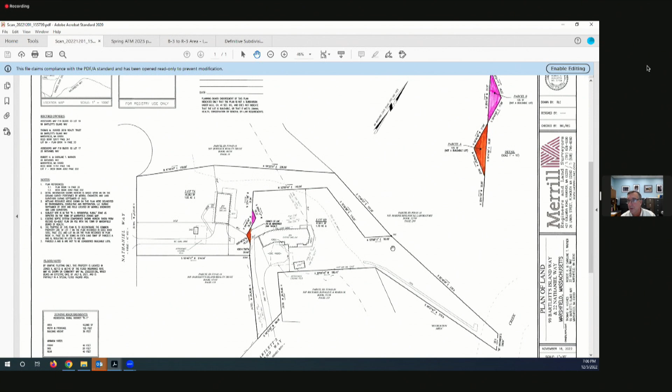Okay, all right. So they're swapping the same amount of land between the 2 of them, so the house meets the side setback requirement. Okay.

Any other questions from the board? All right, seeing none, is there anyone here from the public again? See everybody, so just say it if you're there.

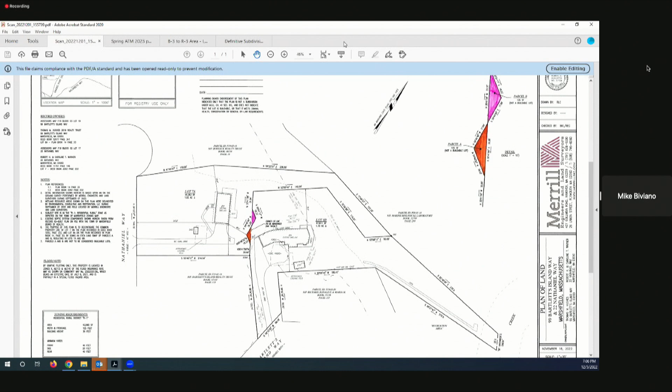All right, I didn't hear anyone, so I'll make a motion that we approve the A&R plan as presented for number 22 Nathaniel Way. Is there a second? Second, Katie O'Donnell. Aye, Katie O'Donnell. Nick Papastratis, aye. Fred Monaco, aye. Still no Kevin. Mike Viviano, aye.

Okay, we're going to move on. We're going to make a motion we open the public hearing for 965, 975, and 985 Plain Street and waive the reading of the notice. Is there a second? Second, Katie O'Donnell. Aye, Katie O'Donnell. Thanks, Katie. Nick Papastratis, aye. Fred Monaco, aye.

And Mike Biviano, aye. All right, who's presenting this one? Steve Guard. Okay, hi, Steve, go ahead. Hi, Mike. Good evening, everyone. Attorney Steve Guard for the applicants, and with me is Ben Verga and Deb Keller from Merrill Engineering.

So I have the distinct pleasure of finally presenting to you folks the definitive subdivision plan that will allow us to install the School Street signalized intersection at School Street and Plain Street. So that having been said, I have a little narrative that I would like to give you as an overview. The plan is rather complicated in the sense that it has 4 property owners, and there's some pieces to the puzzle that we're shuffling around to make this all work.

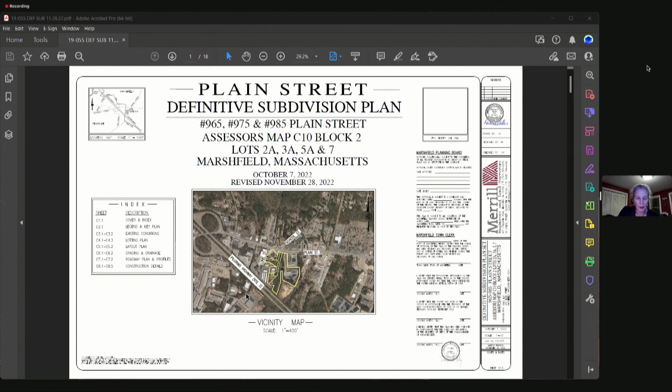Hopefully everybody can see the screen here. Let's see if I can get this out of the way. Again, I'll start from the beginning. This is just an overview of the cover sheet, but it's kind of a nice locus that shows where all the parcels that Steve kindly described are.

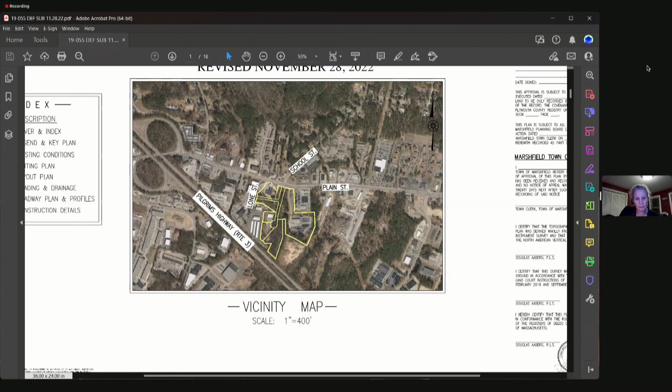Again, this is the DPW site. This is 985 Plain Street here. And then this is the Martin's property in the back.

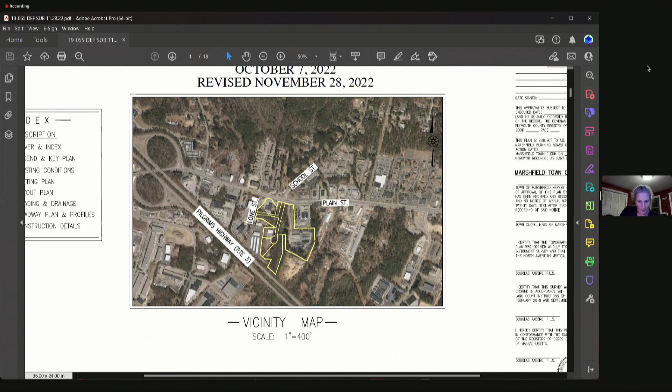So as I move forward, this was our key plan. This one might be helpful to give bearing again to the description of our connector road from Lone Street here on the left-hand side of the plan. So this ties Lone Street to the road, what we call Road B, where we'd have the signalized intersection with Plain Street, identifying the newly defined lots as Steve mentioned, six lots.

So we have lot 1 here being the DPW lot. We have lots 2, 3, and 4, which would be the Martin's property lots in the rear. And then 5 and 6 are the division of the 985 Plain Street property through the creation of Road A.

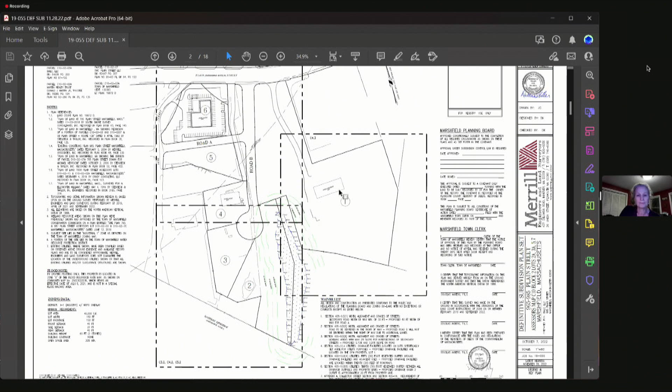I'm going to zip through. This is just existing conditions, shows you the development of 985, and the development in the rear on the Martin's property.

Deb, if I could hold you up there and go back to the existing conditions. Sure. I think it would be helpful for the board if you could just point out the proximity of the driveways to the signalized intersection, and why it was imperative for us to all work together to consolidate those driveways so that they didn't offensively interfere with the signal.

Sure. So the goal is to have the intersection aligned with School Street, which you can see up at the top of the page. To the right is the DPW driveway, so it's not quite aligned with School Street. You have the Martin's property, and I apologize, my little thing keeps flagging there, but this is the Martin's driveway coming out to the rear, again still not quite aligned up with School Street. And then you have Lone Street over here with the geometry that we'd like to help eliminate from a safety perspective, having that tie in.

So being able to pull all three of those driveways together and align them with the signal with School Street would be a much safer situation, eliminating three down to one.

This shows you the road layout again, with the design of the signal going through Mass DOT's review. We do have a wider right-of-way for the beginning portion of Road B to allow for a right turn and a left turn out, as well as one lane coming in, narrowing that down to the traditional two-lane roadways when you get to the remainder of Road B down to the cul-de-sac, as well as Road A here. So those would be the two right-of-ways being created here.

And this shows the end of the cul-de-sac. Gonna hop to basically, so you can see a little bit of we brought in some of the striping for the intersection just to get a general perspective of how the signal would be aligned.

So you can see here, this is the 2 lanes coming into the intersection. So you have a right lane and a through lane, and then a dedicated left lane, and then the one-way coming in. So that all lines up with School Street.

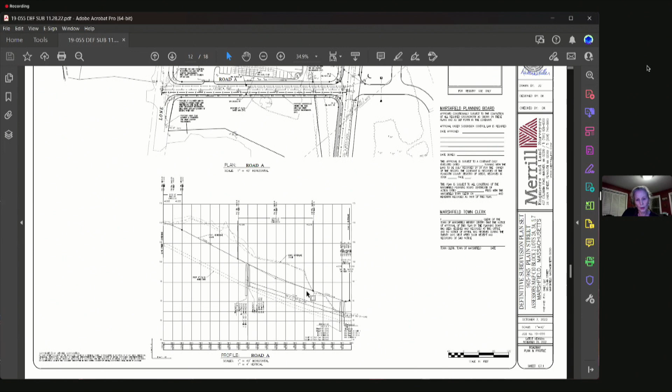So this is the road profile for Road A again. You can see the existing topography we're working with. It does drop off at the intersection, and it's quite high up in this portion of the road. So we're trying to work with that. Let me zoom in.

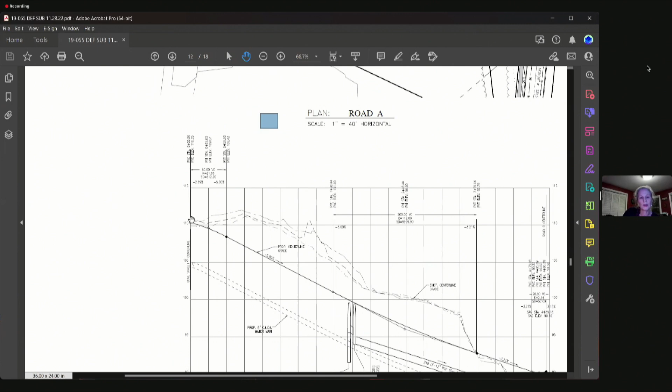This flattens out a little bit here. We're going from almost a 2.7% grade at the intersection to a 5% grade, and then a 3.2% grade as we come into the internal intersection here.

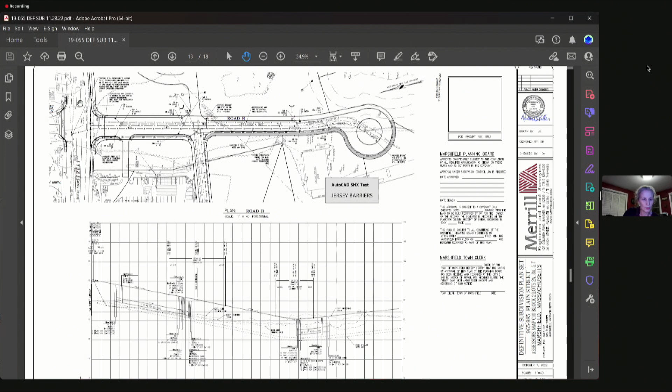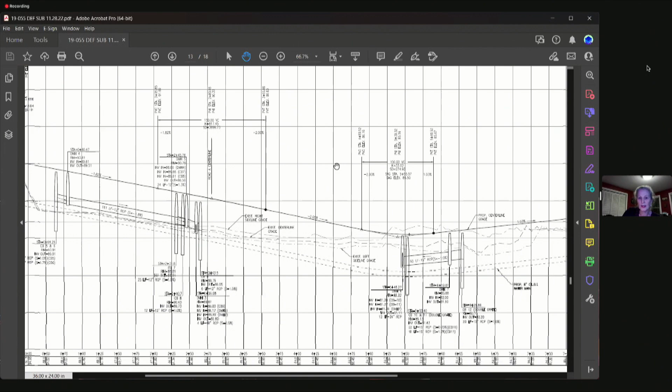Let's zoom out again. This would be showing you the profile for Road B. Fortunately, here we're at a high point, so we don't have to worry about Mass DOT and any drainage going into Plain Street. We will capture it all on site, collecting it into the two infiltration basins we have on property, down to a low point approximately in this location, and pitching back up as we go towards the cul-de-sac. On average, I believe this profile is 1.8 to 2%, so it's a softer grade on this profile.

And then we're into details again. So that's a quick summary of the plans we did. I see Mr. Brennan is on the call with us. We did respond to some comments, and I believe we've addressed all of them.

As Steve mentioned, our understanding was parcels C and D, which I can highlight for you here. This would be parcel C in this portion, and parcel D is here on this side. Let me get you to the lotting plan, I think that'll be easier to see. Okay, so here's parcel C and parcel D.

I think originally we had spoken about conveying those to the town, and those details might need to be hammered out a little bit more, but that was the intent, so it's noted on the plan. I think we had a few cleanup details addressed, and we added the additional waivers I just spoke about to the plan set for the record, along with the street trees along the retaining wall. I think that covers most of everything.

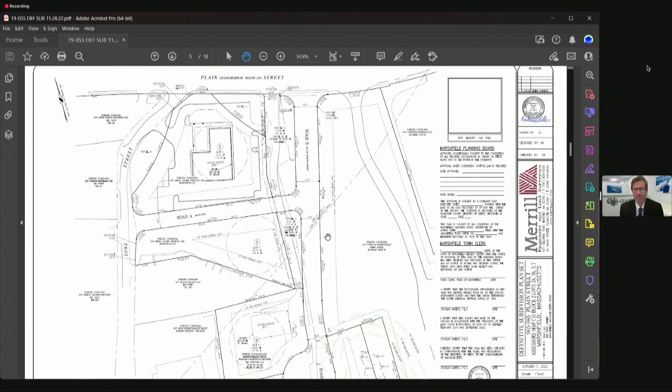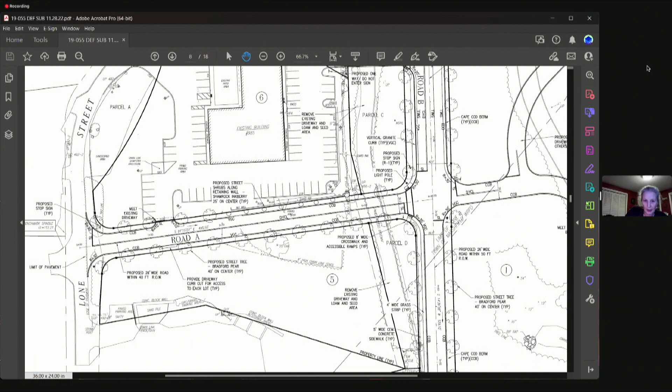Can you show the page that has all the plantings on it? I know it's not a landscape plan, but it's indicative and shows the street trees that were proposed. So you can see I've highlighted all the street trees as compliant, except for in this one section where we have a retaining wall close to the right of way. We wanted to make sure those plantings would be successful, and felt the shrubs would be more successful than street trees in that location.

If the board may recall, when we came back in for a site plan reconfiguration with South Shore Buds, we anticipated this plan coming forward. So the site work and approvals for South Shore Buds are already done, that's all set. When they did the site work on the parking lot, McDougal planned around this plan. We've already dug away at that big hill back there, getting ready for this Road A, so to speak.

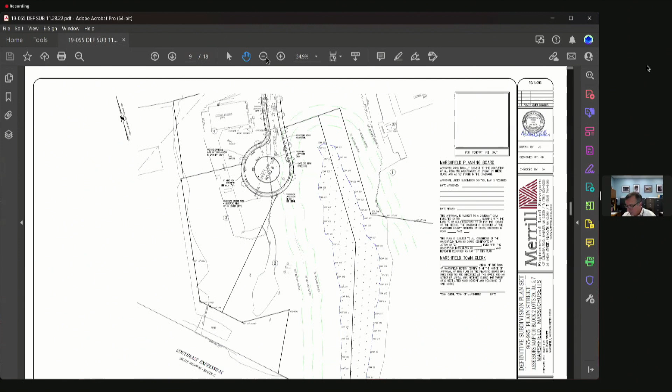On sheet C4.1, the lotting plan, parcels C and D, the plan has those being conveyed to the town.

The northern part of parcel C, I understand why, because you see parcel B has that curve coming down from the 500-foot line from the daycare. So if that was carried over, the top or northern part of parcel C would go to the town and be joined with parcel B. However, the lower part of parcel C and parcel D, I feel it would be better if it went to merged into lots 6 and 5.

Because we're going to have all these scattered little sites of town land, which will be hard for the DPW to maintain, et cetera. So my recommendation is the lower part of parcel C and all of parcel D be merged into those other two lots.

Sheet C5.1 layout plan -- and this also applies to C6.1 grading and drainage, and C8.3 construction details -- what I'm talking about mainly is your street trees and your sidewalks. Pat had kind of brought it up. There are a number of locations where the street trees are not in the street layout, so we would either need easements, as Pat said, or we need to look at the design.

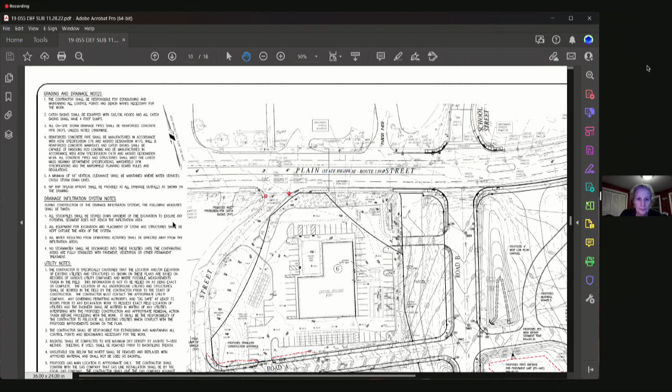The first part of roadway B as you come in has the sidewalk along the street. Then past the intersection of Road A and the DPW drive, it becomes a different road layout, and we have a 4-foot grass strip between the sidewalk and the roadway or the Cape Cod berm. One way to deal with this is to put the sidewalk right up against the street, shift it over, add the 2 feet from the outside of the sidewalk and the 4 feet to the area, and plant the trees right on the property line. That gives us a better buffer between the street trees.

I brought this up because at Beaver Crossing, a recent subdivision, it was a very tight area between the street and the sidewalk. As the street trees were being installed, several DPW people mentioned to me that the street trees are only going to crack the sidewalk as they grow up -- you need a wider strip. So that was something I wanted to mention. Also, there is no sidewalk along Road A, which they did mention.

One of the questions for you guys to think about: what is the truck traffic we expect off of Lone Street, the size of trucks, etc.? Could we change Road A from a 26-foot wide paved road to a 24-foot wide road? And then maybe shift the road off center and put the street trees only on one side, since you already have the retaining wall on one side.

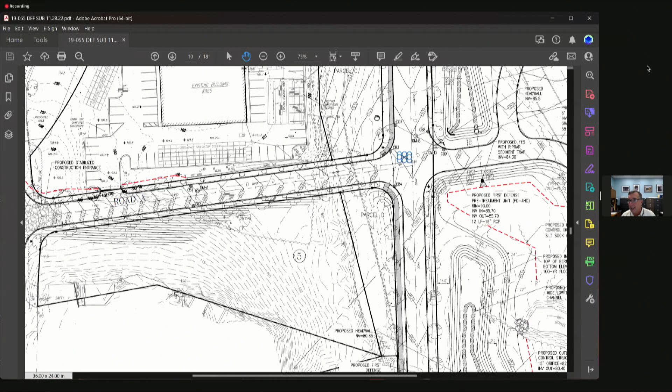So just something to think about also for Pat to take a look at. Then under Road B, station 0 to 100 up at the top by the intersection with Plain Street, the entrance lane is 18 feet wide until we get to the entrance driveway for Buds. Then the road bumps out a little and goes down to a 14-foot wide entrance lane.

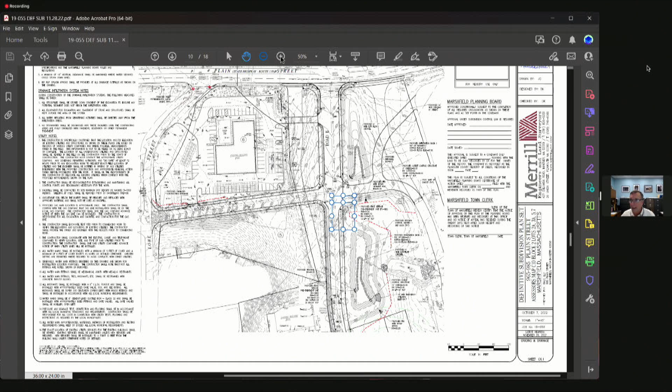So you have one lane coming in and two lanes going out. My question for everybody is, should we just make Road B from 139 to the Road A DPW driveway one width wide? We're going to have a lot of dump trucks and other trucks going into DPW, et cetera. Does that wide width make sense at that intersection to ease turning? If the Kia/Quirk connection is continued or left, we could potentially have car carrier trucks going through that intersection as well, so standardizing that roadway width may make sense in that section.

That's actually it for my comments for now. We know that DPW would like to hammer out a few things, so my recommendation to the board is that we will probably continue the public hearing either to January 23rd or the first date in February, if we hear any comments from DPW on that tonight. With that, Mike, I'm all set.

Shauna has had her hand up for quite a while. Okay, I'll go to the board first to see if they have any questions. Any of the board members have any questions at this time before we go to the public?

Yeah, Mike, I have a few things I just want to confirm. One is there are no proposed changes to Lone Street in this, correct? That is correct. Right, Nick.

We played with a whole bunch of ideas of what would happen to Lone Street, and I think that's still in progress—whether we end up closing it off and put like a turnaround down there for the motorcycle place and for the other South Shore Buds entrance. You're probably going to ask what are we going to do with that entrance. I think ideally we'd want Lone Street to temporarily be a right turn in only, hopefully, and then everybody will go to the light. But ideally it's kind of up to the town what they want to do there. I think there's a lot of options, none short of eliminating it altogether, as long as we can get fire trucks in and out and around there, as opposed to making it a do-not-enter or something like that.

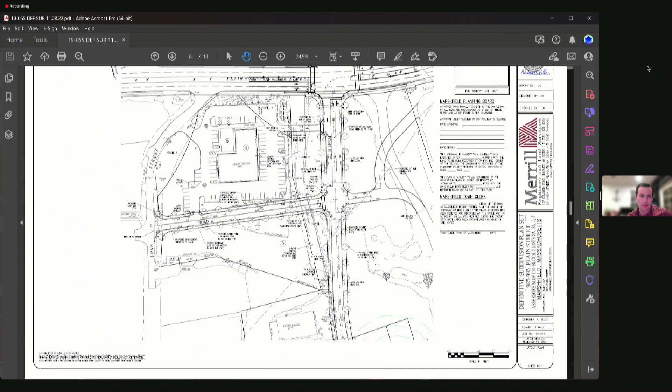Okay, thank you. The next is, I guess this plan shows it better—it looks like there's two proposed crosswalks over Plain Street. Is that correct? Yes, here there's actually four going all the way around the entire signal intersection. Okay, great.

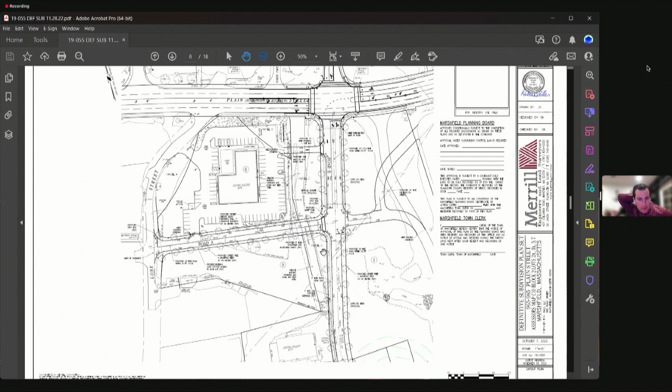Next question, the cul-de-sac, that inner circle—what's proposed? Is it a Cape Cod berm? I didn't see a note on that. So we have, I believe, Cape Cod berm currently, and then the interior of the island would be landscaped. Okay, oh, is that what the CCB is? CCB, okay, yes, gotcha—Cape Cod berm, yep.

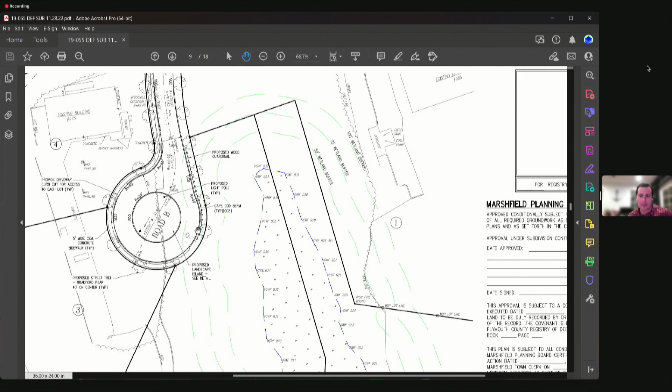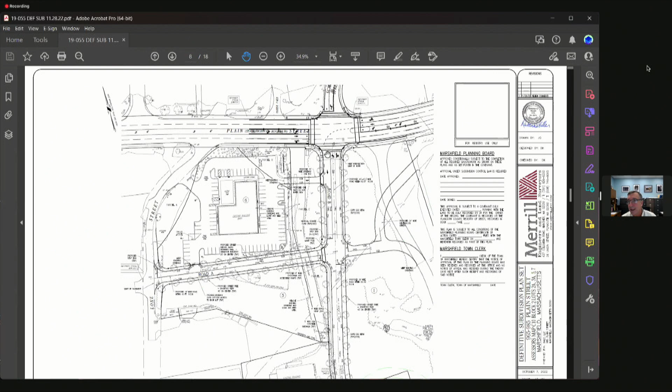Perfect. And then I don't recall discussion on this—has there been a traffic study related to this intersection? Yeah, Ian, we have the team that we have on the MassDOT application is the traffic company. I'm sorry, I was going to say, Nick, we have under the 75% design to the state, there is an attached study. Okay, great, all right. I think that was everything I had.

Okay, thank you, Nick. Anyone else from the board right now? I'm all set. Okay, great. I can't see everybody, so if you're on the board—Kevin is with us now. Yeah, Kevin's with us, he joined a while back. Okay, seeing no one from the board, I'm going to go to the public.

If you could just say your name and address—Shauna, I'll go to you first, thank you for your patience. Yes, Shauna Manning, unit owner on Parish Path. And my concern with the new traffic signal at School Street—Parish Path is separated from School Street with the Sowing Seeds Church. And I do not see how I will ever make a left-hand turn out of Parish Path with the lights there and the amount of traffic.

How do you make a left-hand turn coming out, cutting across, coming out of Parish Path? I don't see how I'm going to make a left turn to go to downtown Marshfield. Is that a double yellow anyway, going down there now?

Is that a legal left turn right now? Yes. Parish Path at the end of the street has no stop sign, and you can turn right or left to get out of Parish Path onto Plain Street. With this traffic light, I don't see how I can leave Parish Path and take a left turn.

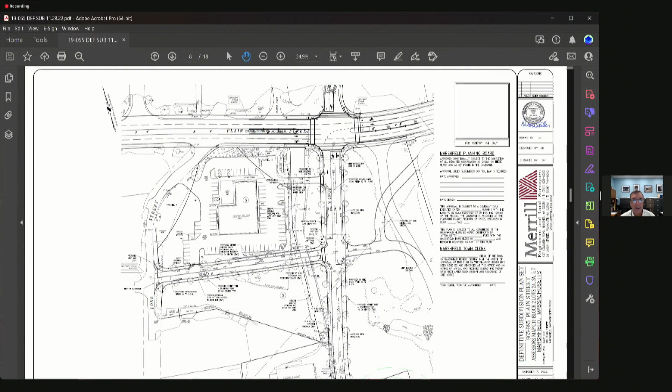You'd have to see the air photo in order to see it. Let's see, hold on one second. I'll share this. Yep. So Greg, you're thinking it needs a new connector behind sowing seeds? So see where the arrow is? Yep, and here's the driveway.

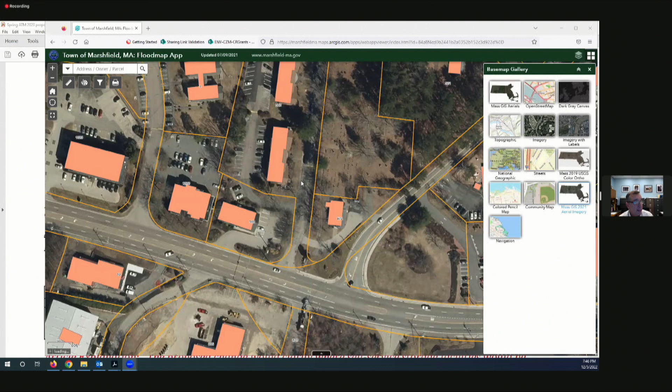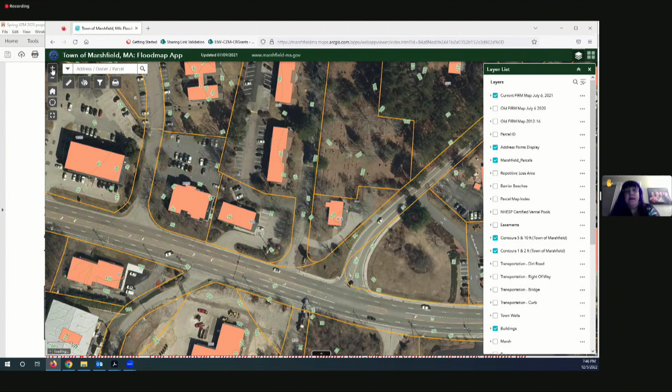It is rather steep when you go where they are now and go to the very back where it's wider. There's a little way onto School Street, and it is steep. Yeah, and the way Greg proposed it is steep as well, I believe. Is that correct? Yes, it is.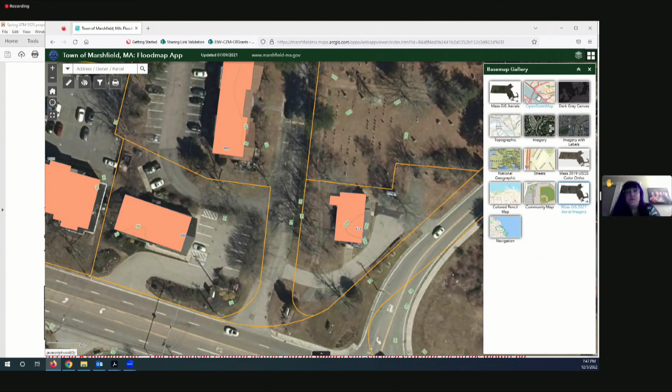Are we trying to roll this all into one plan to help Parish Path here? I'm just saying there's something that can be looked at. This is already at 75% design with the state, which had the design for the School Street intersection. Excuse me, but it seems people overlooked that there are about 100 cars on a small lane right next to this intersection, and not only are there about 100 cars of people that live there, but there's also deliveries and other traffic. That's why I'm making the suggestion for the applicant to work with the state to see if we can alleviate that.

So Mike, there's a couple of contour lines close together down here, see the 94? Yes, but that's not a major grading job. So it's a discussion that needs to happen with the sowing seeds people to see if we could make that connection through to alleviate left-hand turns out of Parish Path. There already have been accidents since the time I've owned a unit coming out of Parish Path, and the accidents I know of were people making left turns.

No doubt it's an issue. So Greg has asked the applicant if they can look into this issue as well, Steve? I'm not familiar with this, it's all new to me. The state application process has been focused on the state road layout. I've seen nothing that has indicated a problem with Parish Path, but I'm certainly happy to go back to the traffic company and the engineers that filed that application and ask them what the story is with that.

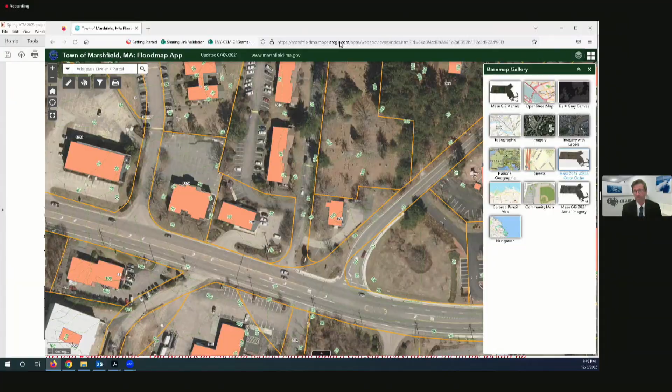Okay, thank you for your comment, Shauna, we'll look into that as well. Thank you, how will I hear back? Well, we're gonna have another public hearing on this, that's how we're gonna get the information back at that point. So we'll give you that date when we end up continuing this.

Is there anyone else from the public here tonight that wants to speak on this? Hi, I'm Erin Skeffington, I actually also live at Parish Path, and I had the same concerns that Shauna had, that's why I'm here tonight. Thank you for joining us, anything else to add, or did she cover everything? Nope, she covered it all. All right, thank you.

So, anyone from the board, anything else they want to talk about before we go to continuance here? Okay, so it looks like we had one unforeseen issue come up that we'll hopefully have more info on at the next meeting. Steve, we can either go to the 23rd or the February meeting.

What do you want to go for? I think we go to the 23rd. Well, Deb, I should defer to Deb, she's pretty busy these days. In all fairness, everybody's pretty swamped, especially over the holidays. You want to shoot for the 23rd? I think we can shoot for the 23rd. I'll touch base with Greg, I think some of the suggestions he made seem doable and we could work through those.

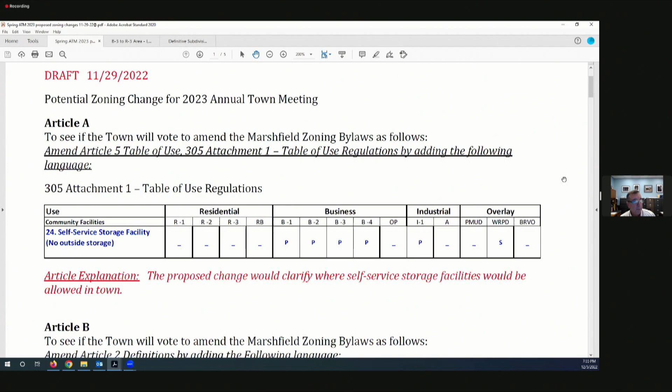First one, Article A, is to see if the board wants to put in a new category into community facilities for self-service storage facilities with no outside storage. Currently we do not have a line for use for self-storage, and we do not have a definition for self-storage. We have several self-storage facilities in town, and other people interested in putting them in, and it would make it easier than trying to fit this under the warehouse and trucking category, because it's kind of a different animal. So that first article would be putting it in as a new use line, allowed in B1, B2, B3, B4, and the I1 district, and a special permit in the water resource protection district.

The second article would be a definition of self-storage facilities. We looked at different towns and the state law for self-storage. The two words in bold - self-service and residential occupancy permits - were suggestions by someone interested in a self-storage facility. We were trying to make it clear that this is not self-storage which also allows residential occupancy purposes, like kitchens, bathrooms, etc. This is just self-storage in the purest sense - you're bringing in your stuff, putting it in your container area or section, and that's it. It's not that you have a bathroom and a kitchen and you're entertaining guests in your self-storage unit.

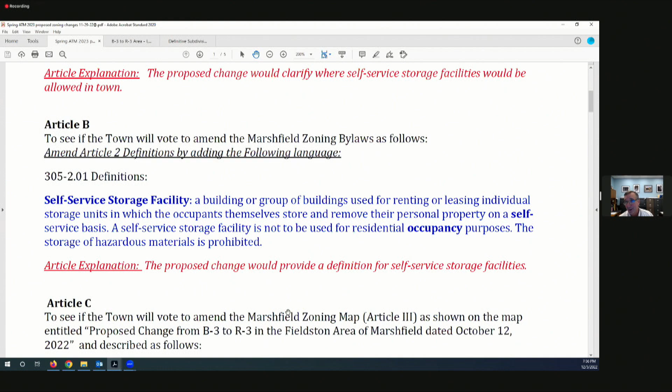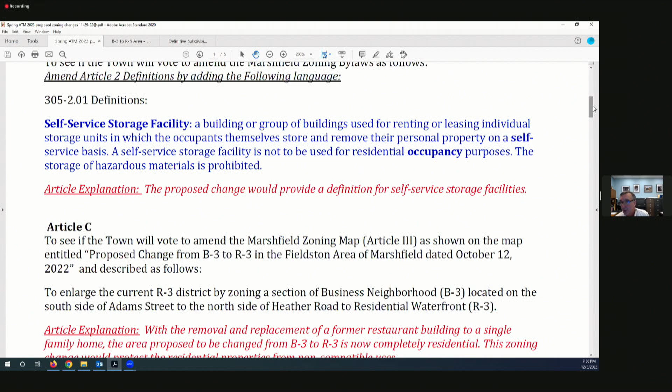Greg, this is just a building, like a regular storage building, right? Yes, similar to the one next to DJ Sullivan and Luchetti's. Similar or exactly what we're talking about? Pretty much the same thing, except they wouldn't have the office/residential unit in the front. Oh, okay, gotcha.

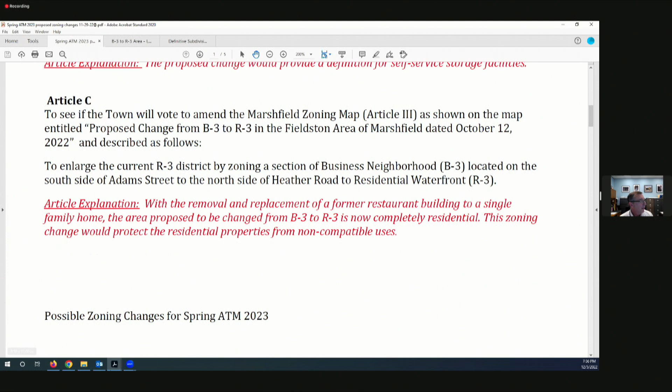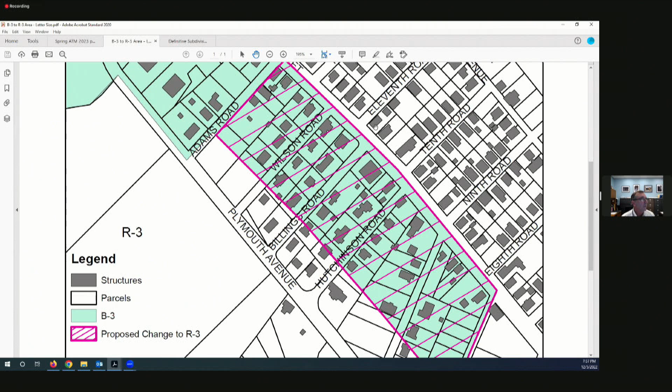Is this the one Joe brought up a while back? Yes. Okay.

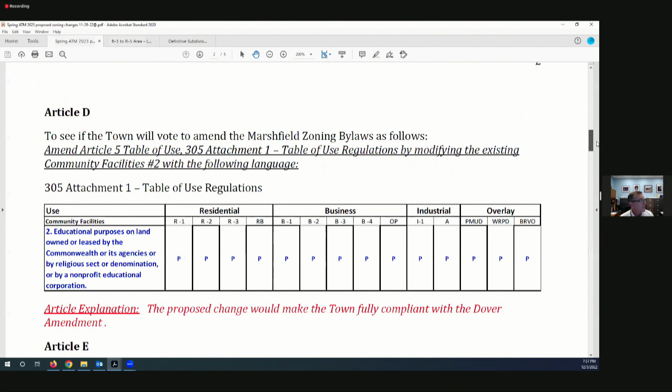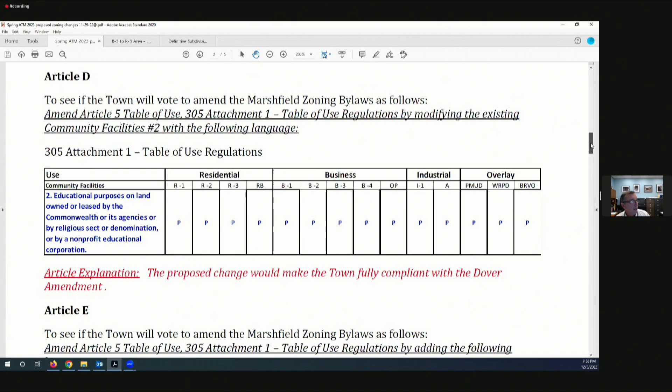The next article is further improvements to fully comply with the Dover Amendment. We would change that to 'educational purposes' so it's clearer and easier to understand. We tinkered with this a town meeting ago or so. Educational purposes on land owned or leased by the Commonwealth or its agencies, or by a religious sect or denomination, or by a nonprofit educational corporation. The nonprofit was missing in our last line item for that. Again, under the Dover, it is supposed to be permitted in every district, so that's what we're showing with the change to the use category line.

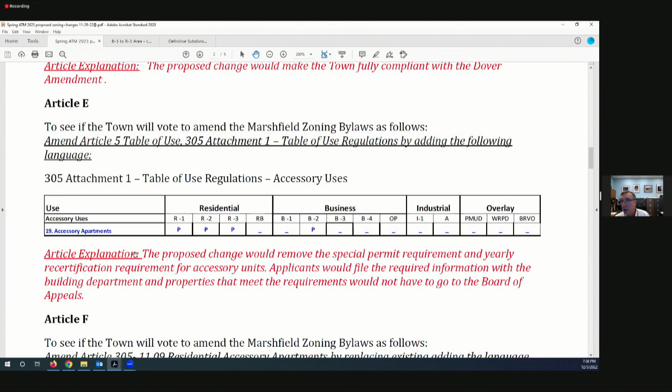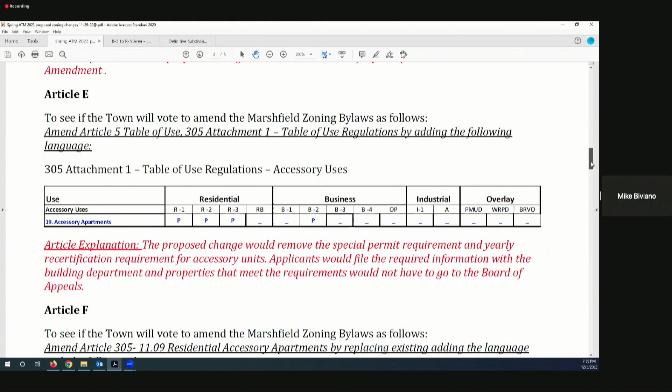The next one down is a change to accessory apartments. We would change it from special permit to just permitted in the R1, R2, R3, and B2. Yeah, Kevin, I think you became unmuted. Probably, yep.

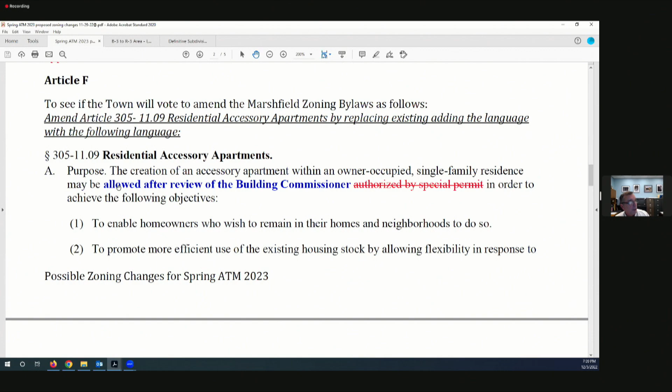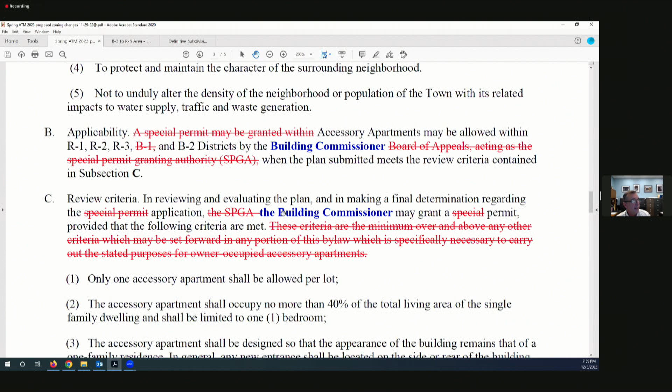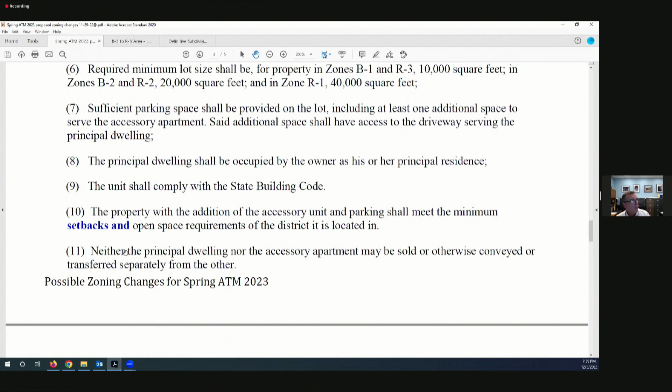The next is further changes to the accessory apartments section of the bylaw. Again, from a special permit, we're going to put it as allowed after review of the building commissioner. Next, under B, a special permit may be granted - we're going to strike that, so accessory apartments may be allowed in those districts I mentioned by the building commissioner. For C, again, taking out the special permit language and basically saying the building commissioner may grant the permit. The majority of the requirements we leave alone. We add the words 'setbacks and' to minimum open space to make that easier or clearer to understand. Then under transfer of ownerships, etc., we're striking the transfer of ownerships and recertification process because it's no longer a special permit, it's just by right.

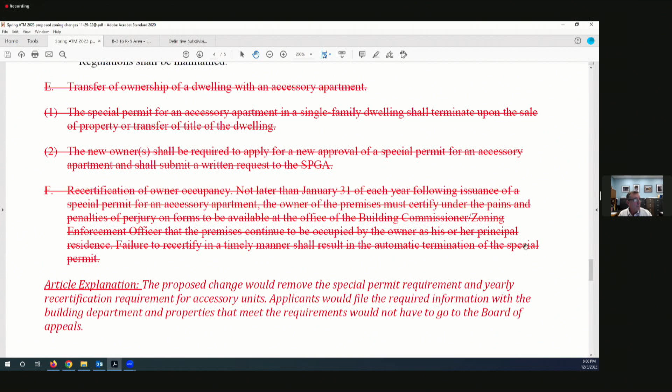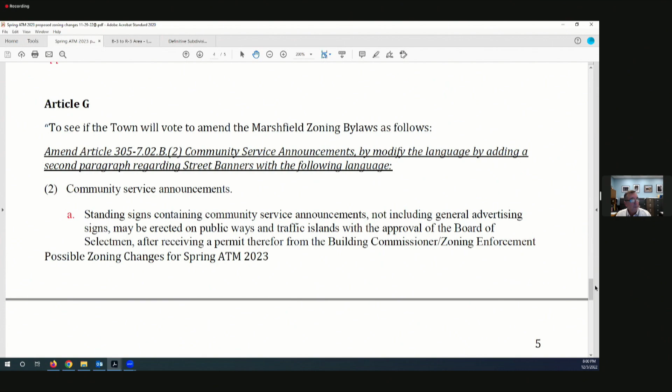The next one is street banner sign requests that had come in from the Brant Rock, actually both Brant Rock Village associations. We talked with Scott Dixon and others, and the staff's recommendation was to make a street banner policy that would work for the whole town versus just the village of Brant Rock. So this is what we've come up with, the language in blue, and it would allow street banners through a process with the selectmen, and if the town did not own the poles or whatever, you'd need to provide evidence - that last sentence where it says 'evidence of written permission from the owner of the utility pole must be provided,' not 'proved.' That would be the change there, and that would allow banners, say up in Marshfield Hills during the art festival, downtown for events, Brant Rock for events - basically any area in town where they're having an event and would like some type of banners or something.

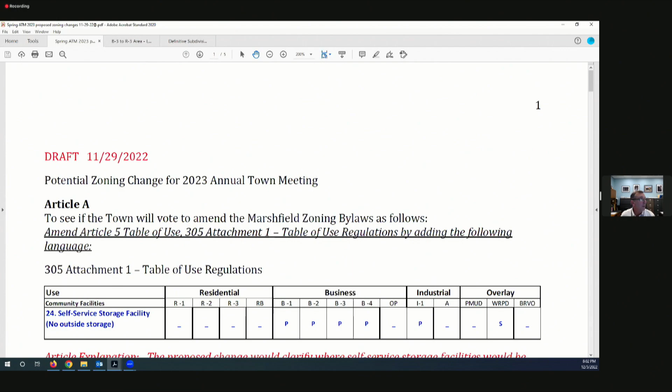So those are the articles that staff is recommending the planning board consider including in the warrant. The warrant will be opening in the beginning of January, the first Monday - actually the first Tuesday because of holidays - and I think the third week in January on the Tuesday it closes. So you'll have one meeting prior to the close of the warrant if you need time to mull these over or suggest changes. Any of those jump out to anybody for comments right now? No. Okay, thank you, Greg.

Moving on, board and staff report, Greg? I don't have anything on the top of my mind. Karen, do you have anything? I always get to this point and I'm kind of like, ooh. No, we don't need - just have the workshop this Wednesday and next Wednesday.

Yes, we have a workshop this Wednesday for the economic development section of the master plan at the senior center. Next Wednesday night, we have a workshop at the senior center at 7. Both of them are from 7 to 9 for the multi-hazard mitigation plan public workshop. And the 13th is the town holiday party at Haddock's, in case any board member would like to attend.